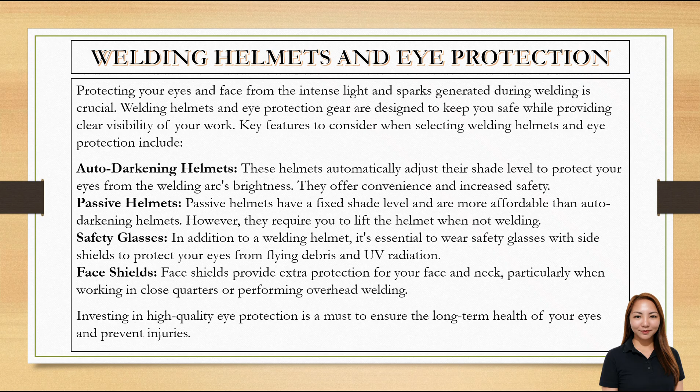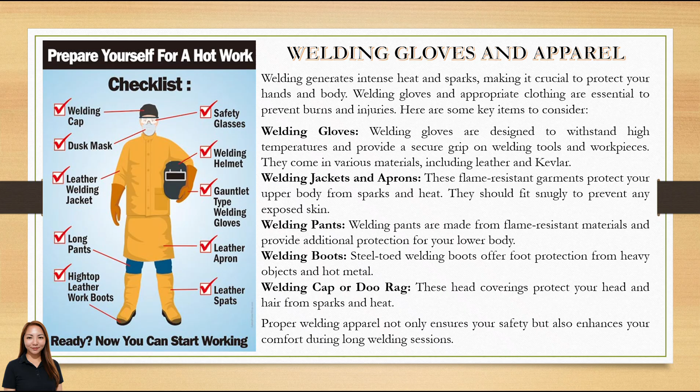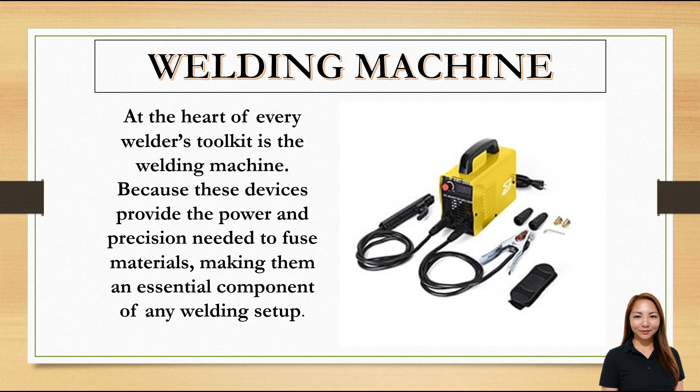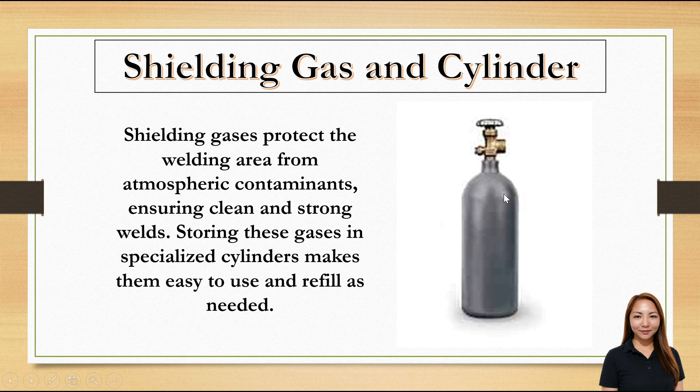Next is shielding gas and cylinder. This is what we discussed in our earlier videos, where our inert gas supply is placed. In shielded metal arc welding, we do not use shielding gas and cylinder.

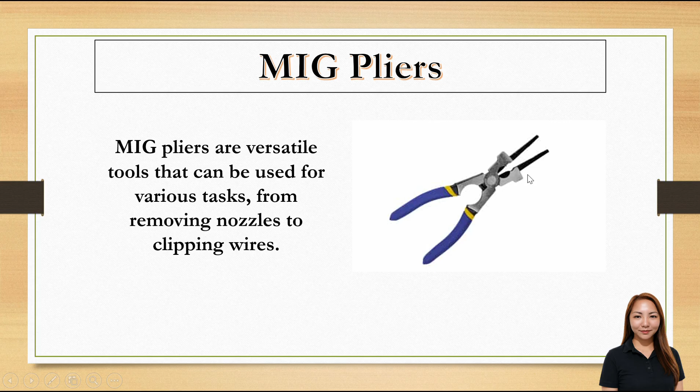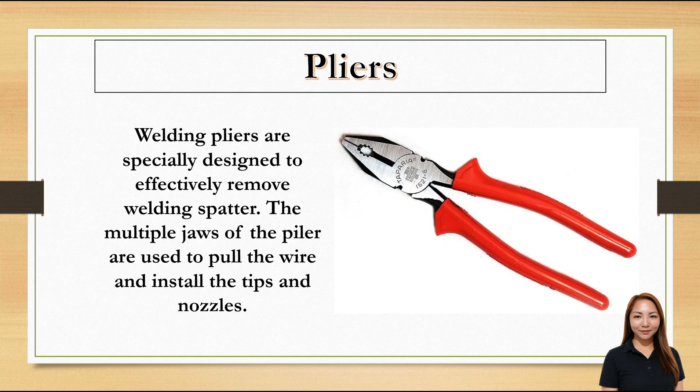We also have here the pliers. Welding pliers are specially designed to effectively remove welding spatter. The multiple jaws of the pliers are used to pull the wire and install the tips and nozzles.

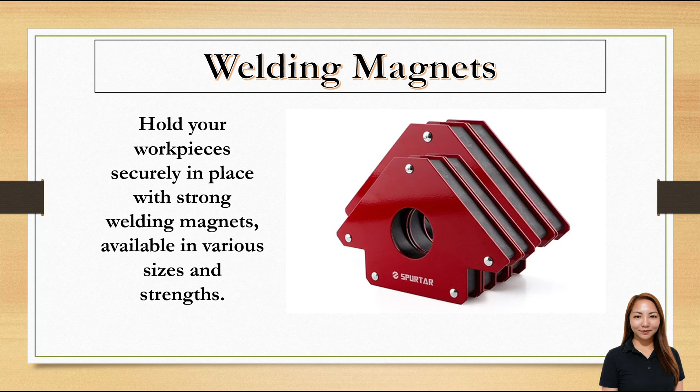We also have here the welding magnets. Hold your workpieces securely in place with strong welding magnets available in various sizes and strengths. That means the heavier or larger the materials we are welding, the bigger welding magnet we need, and of course it should have higher strength.

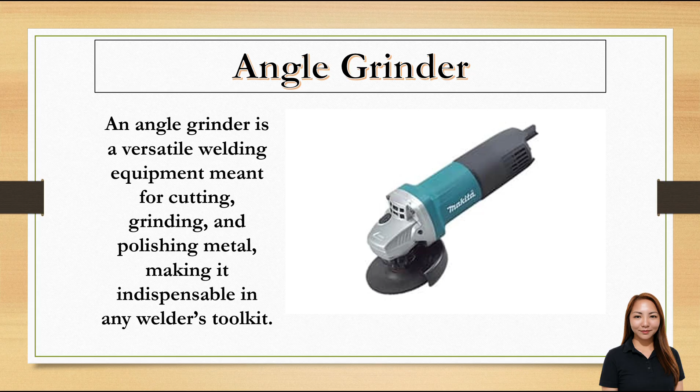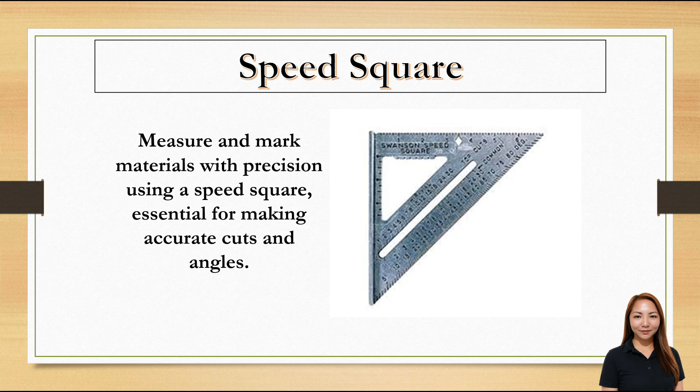We also have here the speed square. Measure and mark materials with precision using a speed square, essential for making accurate cuts and angles.

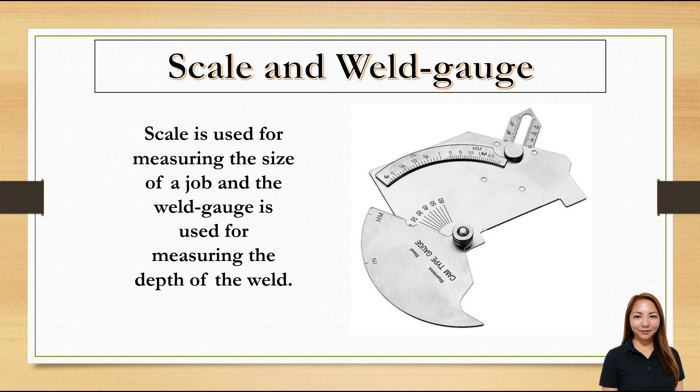We also have here the scale and weld gauge. Scale is used for measuring the size of the job, and the weld gauge is used for measuring the depth of the weld. We also have here the metal file, which smoothens the rough edges and burrs.

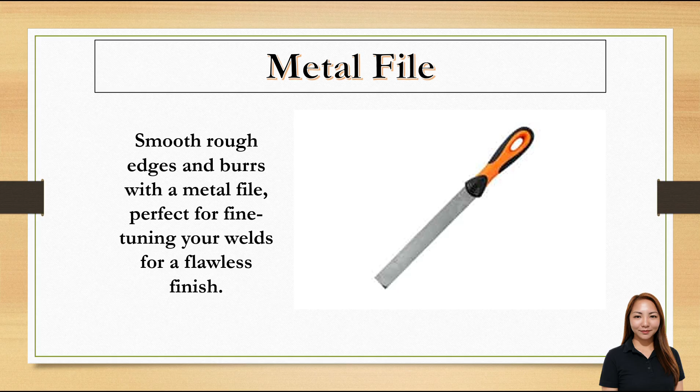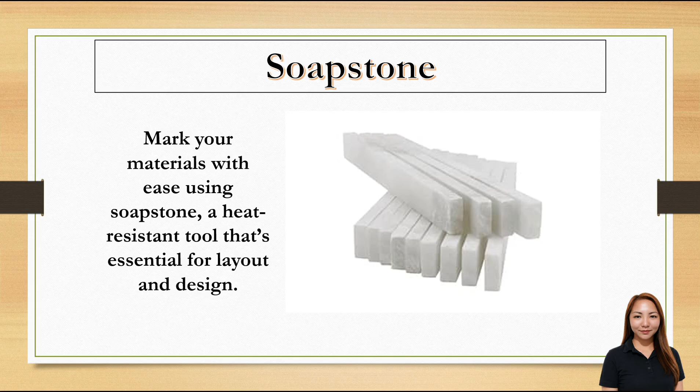Perfect for fine-tuning your welds for a flawless finish. We have here the soapstone. It marks your materials with ease, a heat-resistant tool essential for layout and design.

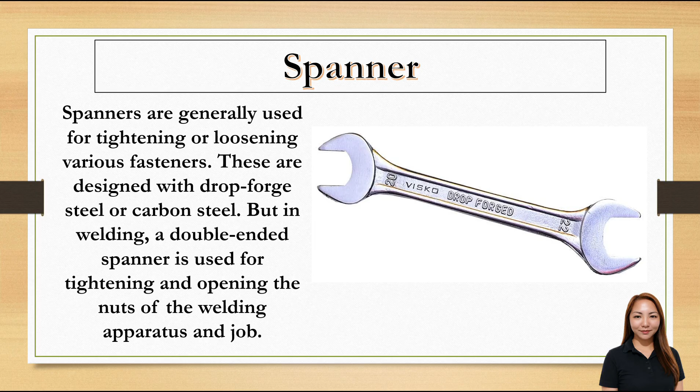The spanner. Spanners are generally used for tightening or loosening various fasteners. These are designed with drop-forged steel or carbon steel, but in welding, a double-ended spanner is used for tightening and opening the nuts of a welding apparatus and job.

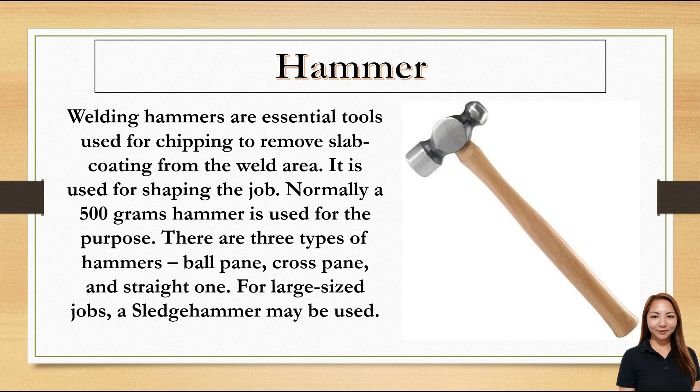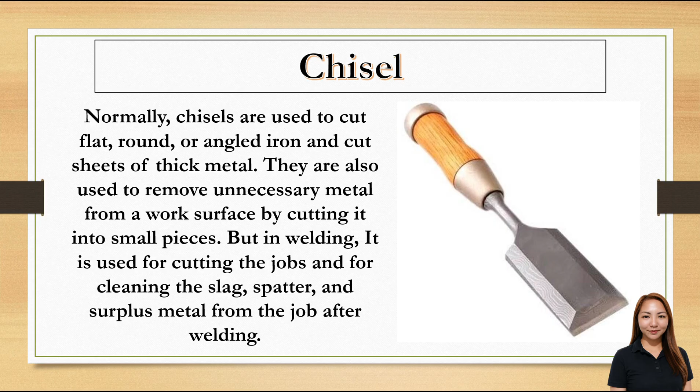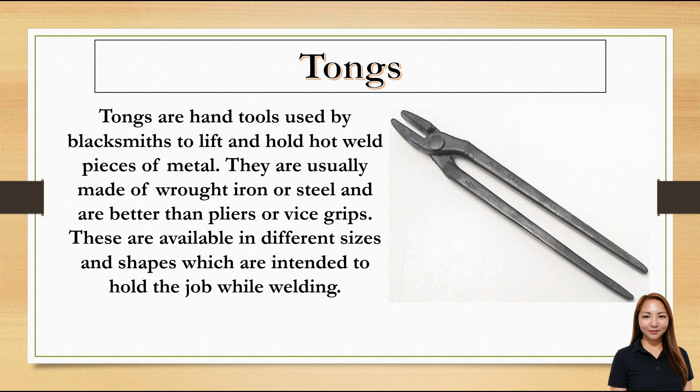We also have here the tongs. Tongs are hand tools used by blacksmiths to lift and hold hot weld pieces of metal. They are usually made of wrought iron or steel and are better than pliers or vice grips. These are available in different sizes and shapes which are intended to hold the job while welding.

Cylinder key. It is used for opening and tightening the spindle valve of the gas cylinder.

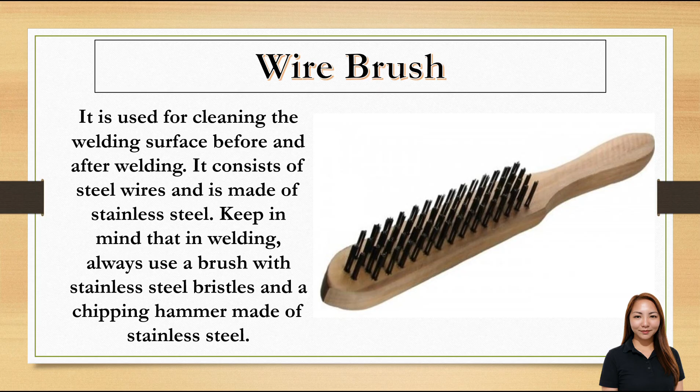Wire brush. It is used for cleaning the welding surface before and after welding. It consists of steel wires and is made of stainless steel. Keep in mind that in welding, always use a brush with stainless steel bristles and a chipping hammer made of stainless steel.

Try square. It is an L-shaped measuring instrument. Its blade is usually graduated in centimeters, and it is used for job measurement purposes. It is also used for checking the right angles of a rectangular job.

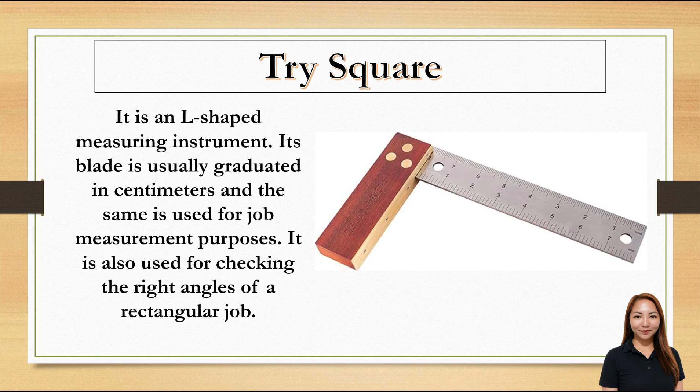Tip cleaner. There is a fine hole in the nozzle. The hole may get dirty and even close during use. A nozzle edges tip cleaner is used for cleaning the hole, as seen in the figure. The tip cleaner may also be used for removing slag from the job after welding is done.

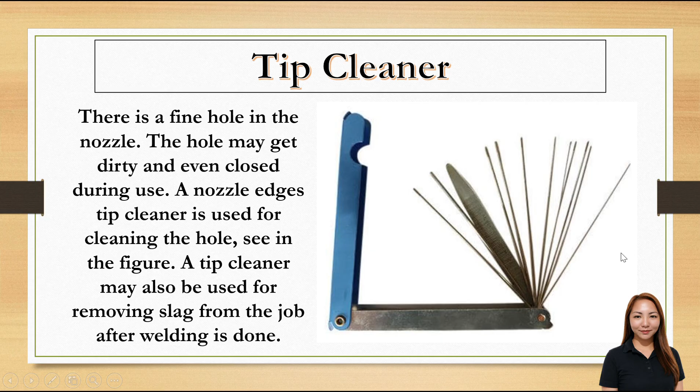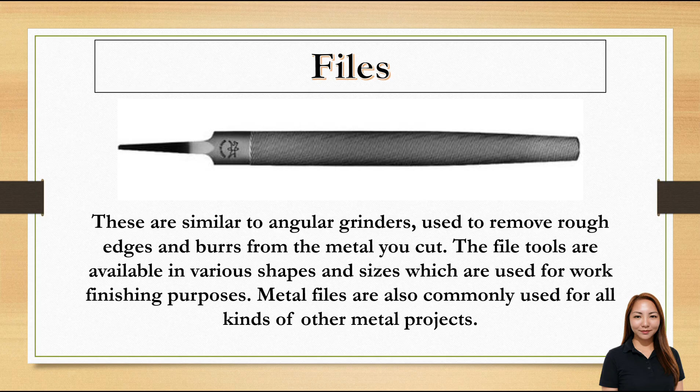We also have here the files. These are similar to angular grinders, used to remove rough edges and burrs from the metal you cut. The file tools are available in various shapes and sizes, which are used for all kinds of other metal projects.

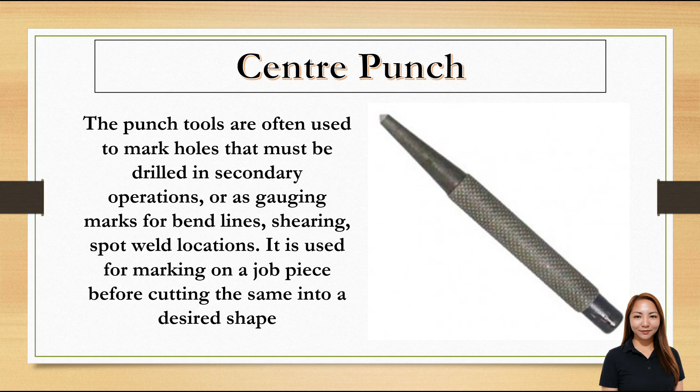We have here the center punch. Punch tools are often used to mark holes that must be drilled in secondary operations, or as gauging marks for bend lines, shearing, and spot weld locations. It is used for marking on a job piece before cutting it into a desired shape.